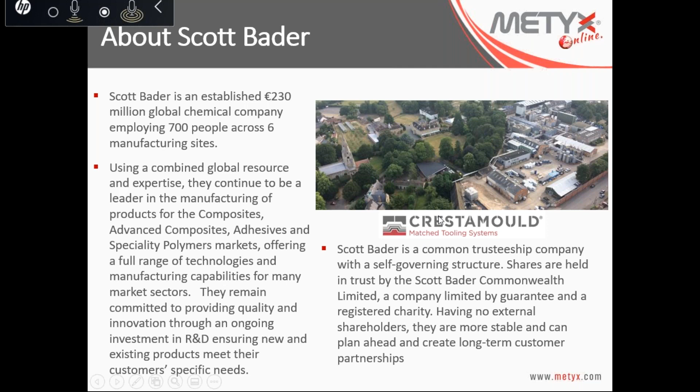Bize gelince, bizim İstanbul, Manisa'da, Macaristan'da ve Amerika'daki fabrikalarımızda marinden rüzgar enerjisine, otomobilden inşaata kadar birçok sektör için teknik tekstil üretimi yapıyoruz. Sözü Neil Bey'e bırakmadan önce bir hatırlatma yapmak isteriz.

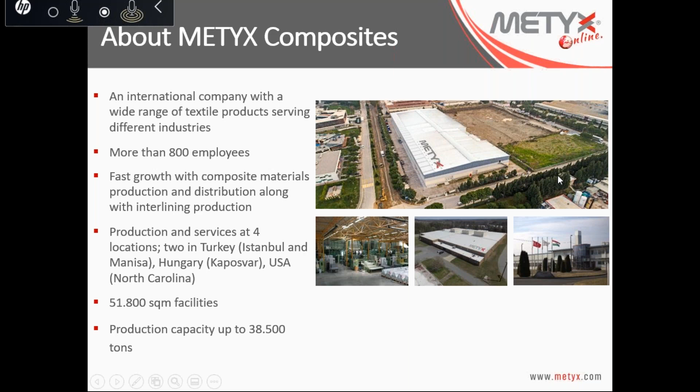So, Neil, I would like to give you the word now and you can start. Okay, good afternoon everybody, my name is Neil Keg. I'm the UK Strategic Accounts Manager for Scott Bader for the Composites division. I work very closely with METYX Composites, who are our Turkish distributor, and I'm the account manager for METYX Composites.

So today we're going to talk about our matched tooling system. We'll go through it in three sections or categories: plug manufacture, plug fairing and surfacing, and then the mould manufacture, as you can see from the slide. So category one is the plug manufacture, and as the presentation continues we'll go through each stage of category one.

The first section is really about the client, the customer, getting the plug prepared, ready for Scott Bader materials to come into play. Most clients to start with will build a plug from either steel or wood, MDF (medium density fiber board), followed by polystyrene, expanded polystyrene, or polyurethane foam type material. We then talk about sealing this product, the tooling compound that we have, and preparing the polystyrene foam ready for fairing and surfacing.

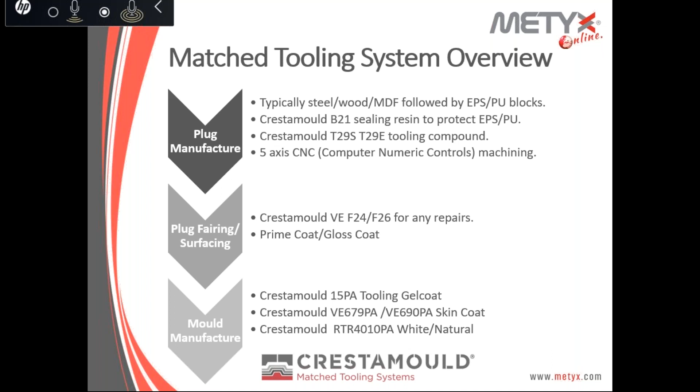So, once we prepared the plug with the expanded polystyrene foam, styrofoam, etc., our products then start to come into play. The first product group is called Crestamould B21 sealer. You need to seal the polystyrene foam, otherwise it will be under solvent attack. So we've created a product called B21 sealer, which protects that, and you seal the foam using this. You can apply it by either brush or spray application, and you can see an example on the screen of what the material looks like once applied.

Modelinizi, daha doğrusu modelin ham maddesini elde ettikten sonra, burada ham madde olarak köpük kullanıldı, fotoğrafta gördüğünüz gibi. İlk önce bu köpüğü astarlamanız, seal etmeniz gerekiyor; çünkü uygulayacağınız kimyasallar köpüğü eritebilecek stirene sahip. Bunun için bir astar uygulamanız gerekiyor. Burada Scott Bader'in Crestamould B21 sealer dediğimiz bir ürünü var; solvent free, styrene free bir ürün, içinde styrene yok. Bu sebeple bunu çok rahat bir şekilde köpüğünüzün üzerine uygulayabilirsiniz. Ardından kürleşmesini bırakıyorsunuz ve kürleştikten sonra diğer macun işlemlerine başlıyorsunuz. Uygulaması çok kolay bir malzeme; fırçayla ya da spreyle çok rahat uygulayabilirsiniz.

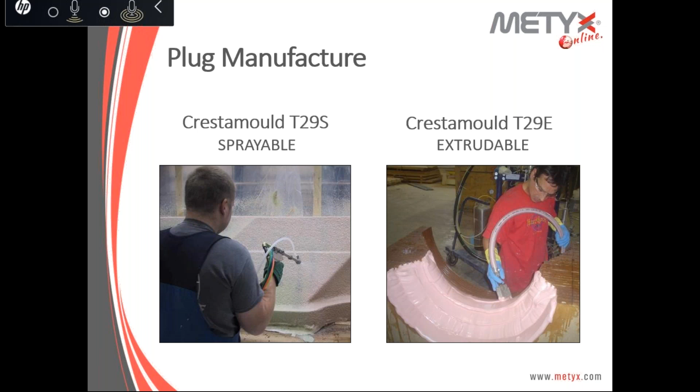The next category is the fairing and surfacing of the plug, and we have a range of two products in our fairing range. A product called Crestamould F24VE, which you can see there — the next slide is F26. The difference with the 24 is that this one's VE, which stands for vinyl ester, so it's very lightweight, based on a vinyl ester base resin, and has excellent water and corrosion resistance, as you can see from the slide.

It has been developed for the marine sector, so it can be used as a fairing compound not just on tools but on mouldings for the marine sector, and because it's vinyl ester based it can be used under the waterline. It has extremely good adhesion to fibre reinforced polyester, can be easily sanded, is very lightweight, and has excellent impact strength. So that's the vinyl ester version.

The next one is a more multi-purpose or standard fairing compound, called F26. This is a polyester base, not a vinyl ester base — probably more of a general purpose type. Also very light, I think with a specific gravity of about 0.6 to 0.7. It can be very easily worked, sanded, and applied, giving you a very good surface finish ready for you to coat your plug with, which we'll come onto after Murat's done the translation.

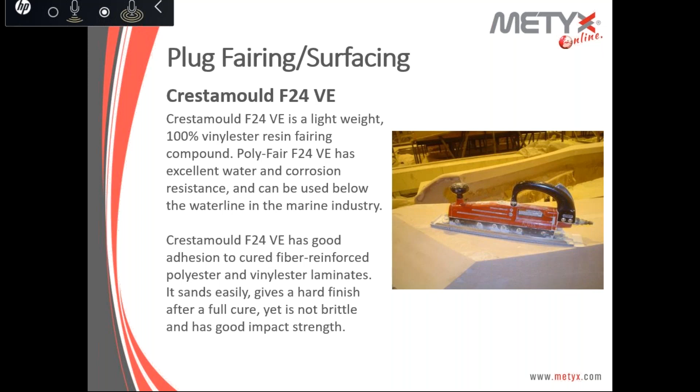Sadece kalıpta değil, biz burada model kalıp yapımını anlatıyoruz ama genel olarak marine tarafında onarım için de bu vinilester bazlı macunu kullanabilirsiniz. Çok iyi bir dolgu özelliğine sahip aynı zamanda.

Bir diğeri ise aynı amaç için üretilen 2 ürün. O vinilester bazlıydı, bu F26 ise polyester bazlı. Bu daha genel amaçlı, maliyet açısından daha uygun bir malzeme. Bunu da yüzeyinizde, modelin yüzeyini daha iyi bir hale getirmek için kullanabilirsiniz. Genel olarak birbirine benzer malzemeler, sadece birisi vinilester bazlı yüzey kaplama macunu, diğeri polyester bazlı.

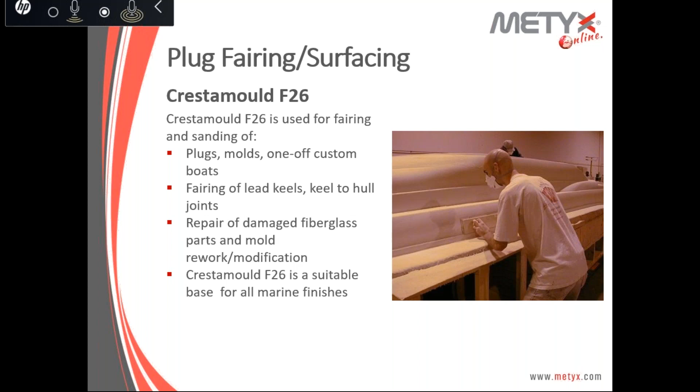We talked about the T29, the sprayable and extrudable products, but if you're not using those for 5-axis machines and you're just making a traditional plug, you can coat this. You can use this on more traditional MDF and GRP fiberglass.

You can apply it wet on wet, thickness of up to 1.5 mil in one operation. The viscosity of the product allows it not to drain on vertical surfaces, and it cures and hardens rapidly to give a very smooth, easily sanded finish.

Some clients use this product without using a gloss coat, so you can get a reasonable gloss level using this product. However, if you want a much higher gloss finish, we have another product, which you'll see on the next slide, called Crystic Gloss Coat.

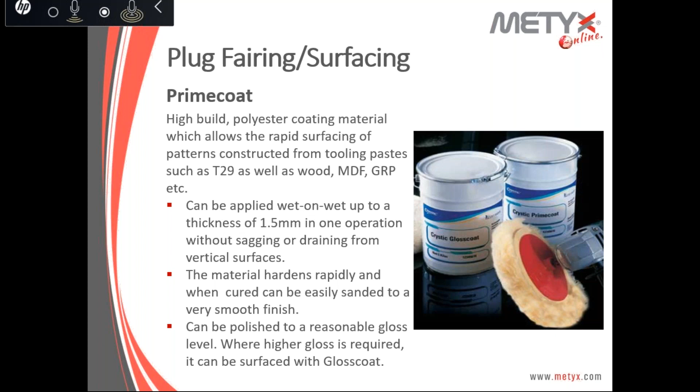Scott Bader'in iki ürünü var ama birçok müşteri belirli oranlarda Prime Coat ve Gloss Coat'u birbirine mix ediyor. Örneğin parlak bir model istiyor ama çok da parlak istemiyor; sadece Prime Coat uyguladığından biraz daha parlak olsun ama sadece Gloss Coat uyguladığındaki o yüksek parlaklığı vermesin, ya da tam tersi. Prime Coat'la Gloss Coat'un oranlarını kendi isteklerine göre ayarlayarak tek bir uygulamada bunu yapabiliyorlar.

Burada belirttiğim gibi ikisini aynı anda kullanmak zorunda değilsiniz. Sadece Prime Coat'u kullanabilirsiniz, veya daha yüksek parlaklık için sadece Gloss Coat'u kullanabilirsiniz, ya da ikisini birlikte kullanabilirsiniz. Çok yüksek bir parlaklık seviyesi için ya da belirli bir oranı tutmak için ikisini müşterilerimizin uygun göreceği oranlarda mix edip kullanabilirsiniz. Bu tamamen son kullanıcının, yani sizlerin karar vereceği bir durum.

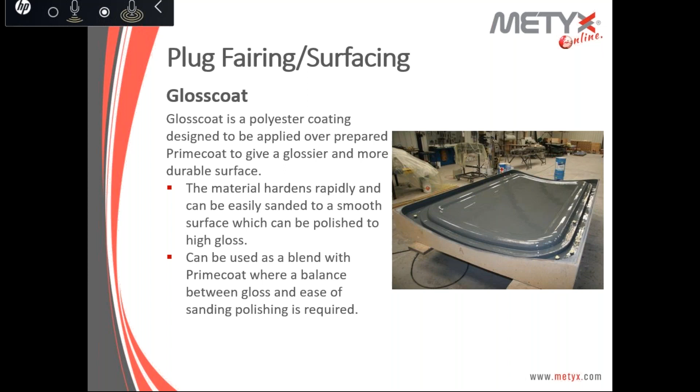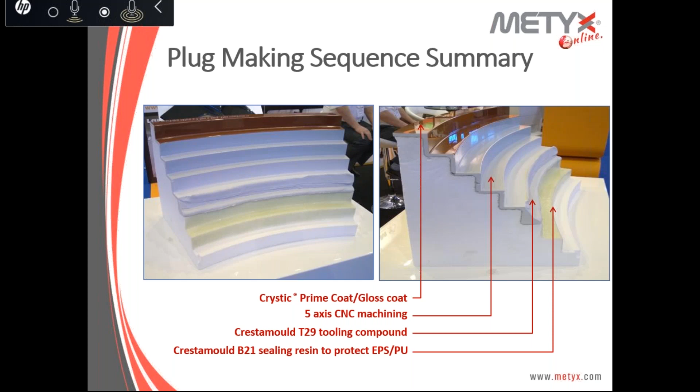So we're now in a place where we're positioned to apply the mold making system and sequence. You've prepared the plug, and you now apply the release agent. You obviously want the mold to release from the plug, so you apply your appropriate release agent systems, and I know METYX offer a system.

We're now into the last category of making the actual mold, and there are three product groups here: the actual tooling gel coat, the actual skin coat, and then the actual tooling resin itself. So if you go to the next slide...

Unless Murat, do you want to? Yeah, I want to continue from here.

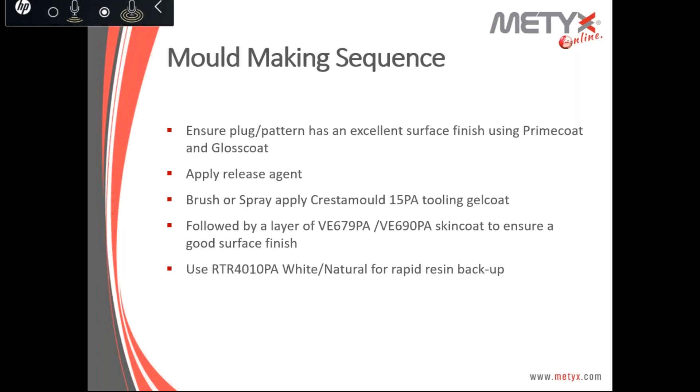Okay, so we have a tooling gel coat known as 15PA, Crestamould 15PA. It's a vinyl ester tooling gel coat. It's been established and developed for many years now, used in a wide range of market sectors for marine, building and construction, sanitary, wind - all market sectors for mold making. Like I say, vinyl ester based, both brush and spray.

And when you use it with the next two products, which you'll see in this sequence - our skin coat and our tooling resin - there's virtually no fiber print through at all. So it gives an excellent finish, so your mold will last a long time with multiple pulls, and obviously the molding will replicate the level of performance of the actual mold itself. So it's a well-established product.

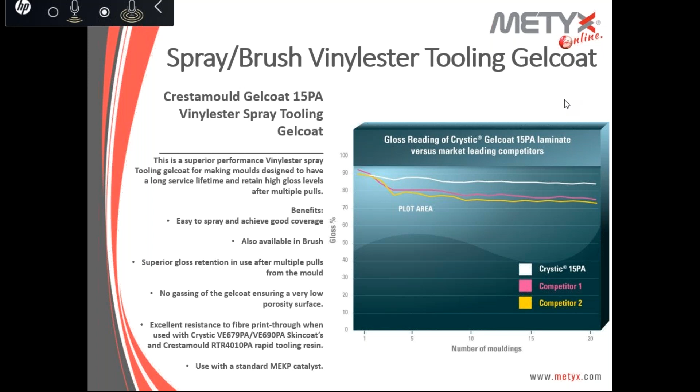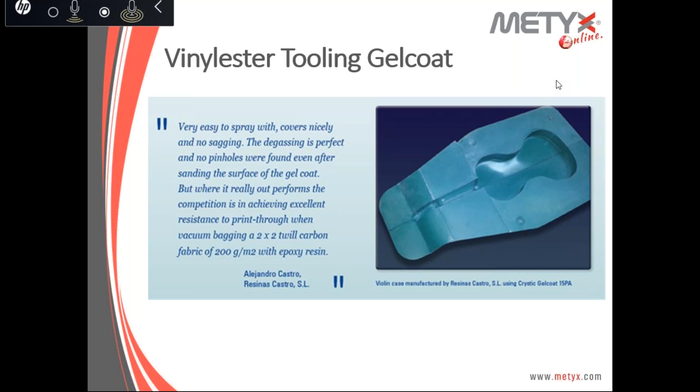So the next product in the sequence is the actual skin coat, and we have two offerings under our range: Crestamould VE679PA and VE690PA. You probably noticed from our previous discussion, when you see PA, that means pre-accelerated. Maybe Murat, you've mentioned that already. So these are pre-accelerated, just the addition of organic peroxide, MEKP, to start the curing process.

So this particular skin coat is DCPD modified with vinyl ester. DCPD stands for dicyclopentadiene, a raw material that we have developed. We have blended it with our vinyl ester-based resins to produce this modified skin coat. Pre-accelerated, as I mentioned, it's thixotropic. The key benefits here are obviously excellent blister resistance, and it significantly reduces the occurrence of print through.

So the difference between the two is that the VE679PA was the original product, but as we grow with our clients and form partnerships and listen to our customers, some of the molds being manufactured are very large and sizable, and they felt that on vertical surfaces, the VE690 is a little bit more thixotropic, a little bit more viscous. So on large molds with high vertical surfaces, the 690 probably lends itself a little bit more to that type of application.

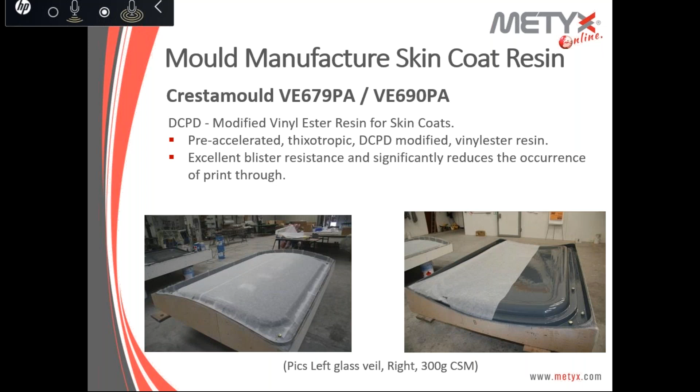Okay, and then this is the final product for the mold making sequence, which is the actual rapid tooling resin, known as Crestamould RTR4010PA. As you can see, we do two versions - we do it in white and we also do it in natural.

RTR is rapid tooling resin, so it's thixotropic, it's filled, it's got a low profile additive in there. It can be used both hand lay application or spray, with excellent handling properties, low shrinkage control, rapid curing, fast turnaround cycle and low exotherm.

Traditionally in the old days of mold making, it would be a long process, and the mold would be on the plug for many weeks, or two weeks minimum. With rapid tooling, the mold can be demolded from the plug and in production very quickly, between 24 to 48 hours. Then the mold is in production and producing moldings.

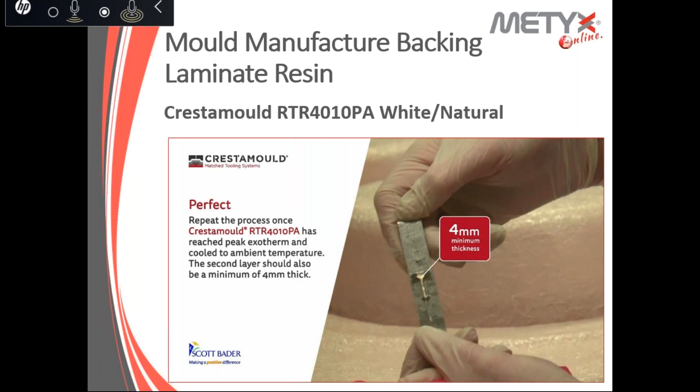Neil, please continue. Yeah, so here are some of the main features and benefits. It's a rapid tooling resin, so it's much quicker than the traditional method, considerable labor cost reduction. Molds can be made quickly and economically, and can go into production much sooner, so moldings can be produced and your sales move quickly. From a commercial point of view, it's a much easier and quicker system than the traditional method.

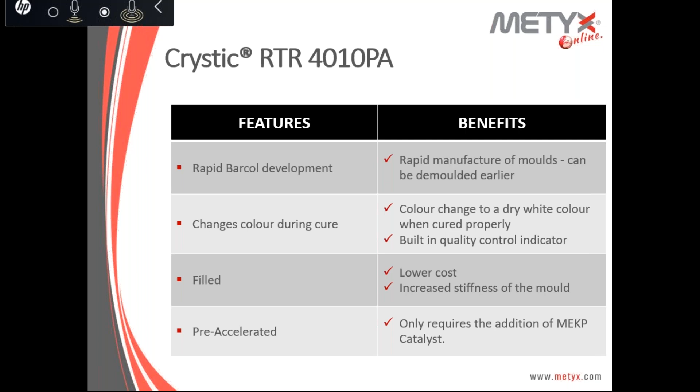Yine bahsettiğimiz gibi malzeme pre-accelerator yani kobaltlı, sadece MEKP kullanarak devam ediyorsunuz. Burada ise az önce bahsettiğimiz kürleşirkenki renk değişimini görüyorsunuz.

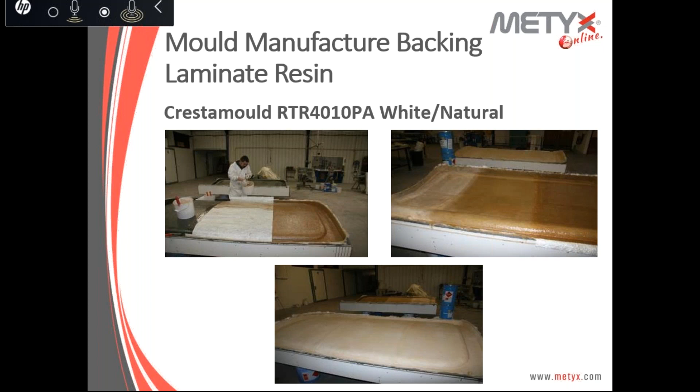Burada bir iki fotoğraf göstermek istedik size. Sağdaki Scott Bader'in yurt dışından bir müşterisinden aldığımız bir fotoğraf. Yine Scott Bader kalıplama sistemi kullanıldı. Soldaki ise bizim Türkiye'deki bir müşterimiz, bir marine müşterimizin yaptığı kalıp, tamamen Scott Bader kalıplama sistemiyle Türkiye'de yapıldı.

Yes, Neil. So this is the final product really that we want to talk about, which is a mold guard material, another product that's been established and developed a long time ago with Scott Bader. This came from one of our largest UK customers who began to store their molds outside, subject to outside weather conditions - hot, cold, wet, windy.

So molds are a time-consuming event, but also a very costly event. So the particular client came to us and said, is there anything you can do for us where we can protect our molds, because we're going to start storing some of them outside, and we've spent a lot of money making these molds, and we don't want to throw them away. We want to use them in the future, just not right now. And obviously space is a very valuable asset for businesses. So we came up with this product.